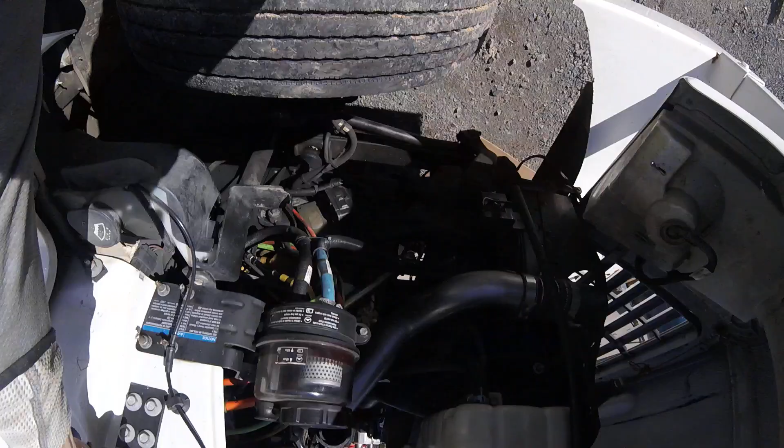Apparently this has been done on this truck fairly recently. Either that or this is just a freak of nature, because these all checked out good. So I'm not even going to adjust them, but I'm going to tell you how to do it in case.

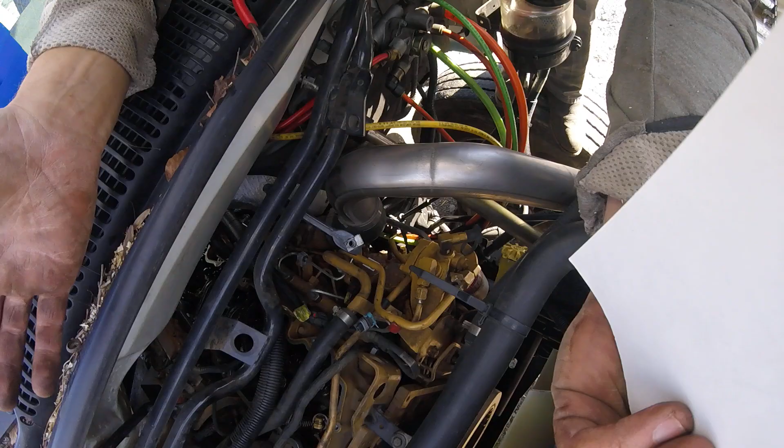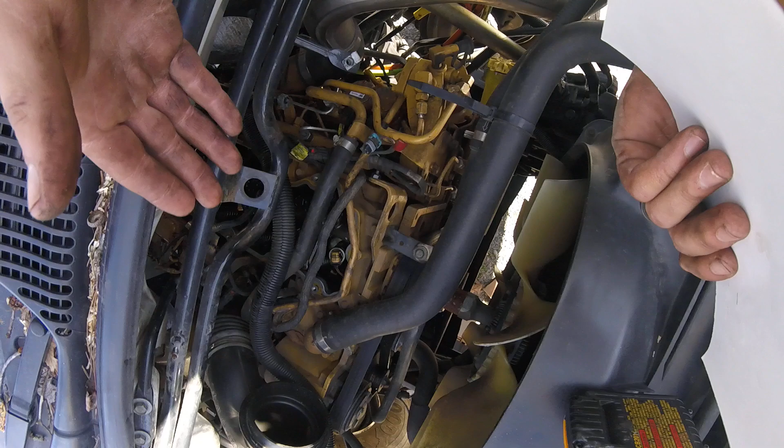This was super easy. Everybody said it was going to be really difficult. They made it out like it was just going to be this hard thing to do. It took me 15 minutes to get this cover off. Look down in there. Not hard.

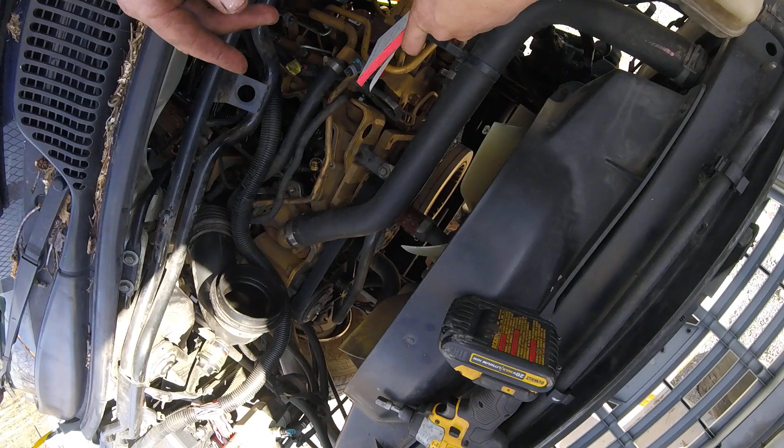What you got to do is, the first thing is to get it to top dead center on the compression stroke on cylinder number 1.

I used a pipe wrench to grab on the balancer there sideways. The pipe wrench kind of went in like this, sticking up, and pull it sideways, and then you can roll the motor over. It's not very difficult. You just gotta hold pressure on it. Don't jack it around. If you just hold pressure on it, it'll kind of bleed the compression off as it turns.

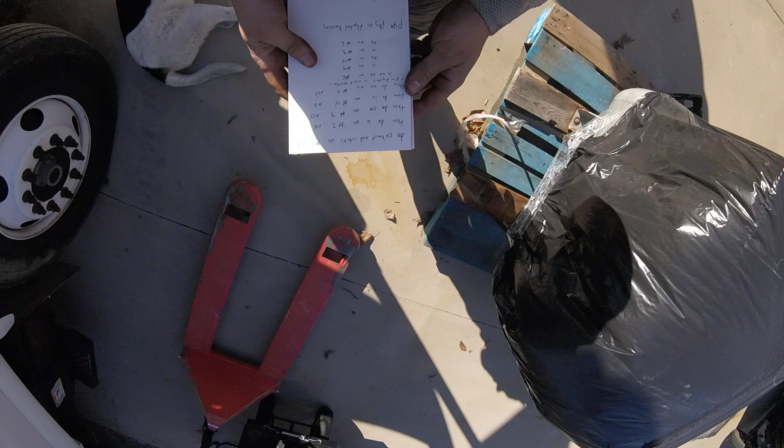You're gonna have to have 2 people, because you take a bolt. They actually said it's gonna be... 6mm bolt, I believe, I'm sorry. And you come over here to the passenger side, crawl up under here.

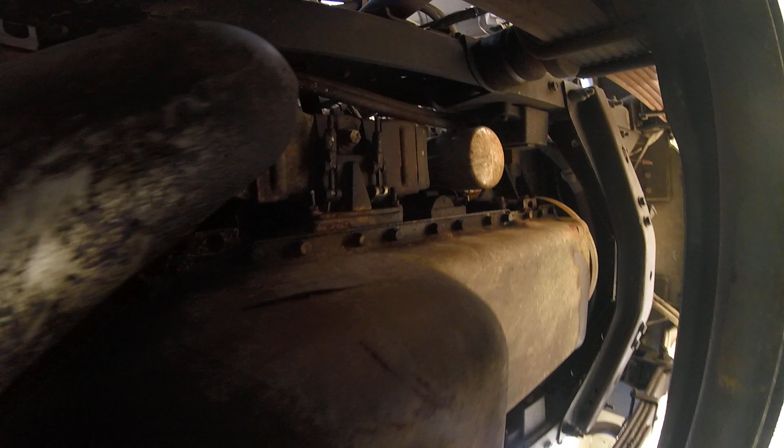Alright, this is the passenger side of the engine, and there's a hole. The bell housing is right here. I hope you can see it. There's a hole. Basically, at the tip of my pointer finger, there's a hole in that bell housing.

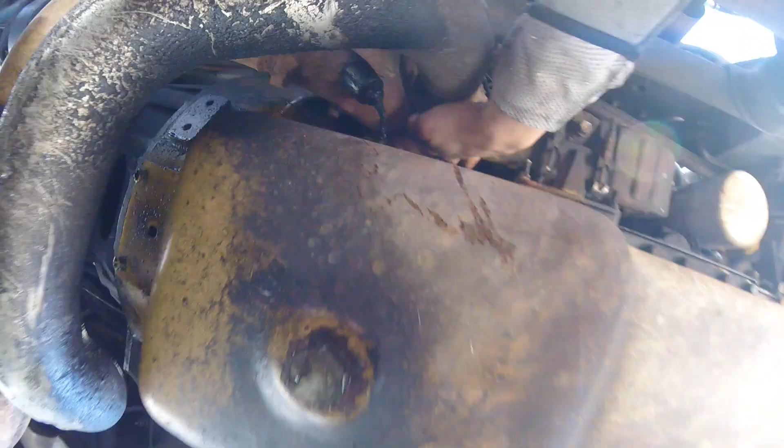You put the bolt in there. It needs to be, I don't know, 4 inches long, and just kind of hold pressure on it. And as somebody spins the flywheel over, hold pressure on it, and then there's a hole in the flywheel, so when the flywheel gets to that spot, it'll just slide in that hole.

And that's gonna either put you on number 1 top dead center on compression, or it's gonna put you on the number 6 cylinder top dead center on the compression stroke, which you have to do both.

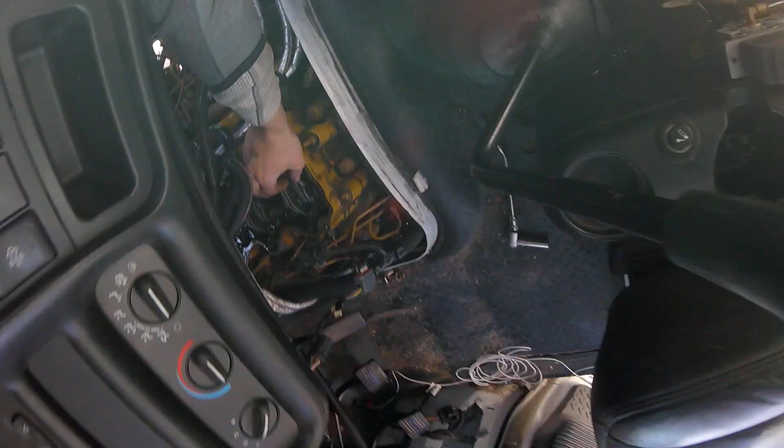So once it goes in there, go up to the valve train here, and if it's on number 6 on the top dead, then these 2 in the back will be loose. So I was on top dead on number 1 right here, so my exhaust is loose and the intake is tight. So if I went to the front, they would both be loose.

So again, if you're on number 6 compression stroke, these 2 will be loose, and you start adjusting from back here.

You'll go intake and exhaust. You'll do both of these. Set the lash on both of these first. You just loosen the jam nut here.

This is the Allen. So you loosen that up, slide your feeler gauge under it, tighten down the Allen until it's just got a little resistance on it, and then hold the Allen while you tighten this guy back down. It's 25 foot-pounds. You can torque them when you're done, it's a little easier.

So, what was I? Yeah, so just hold your Allen wrench so that when you turn this nut, it doesn't turn the Allen as well, and tighten it up or loosen it or whatever, so you know your lash is on. So you go intake, exhaust, and then

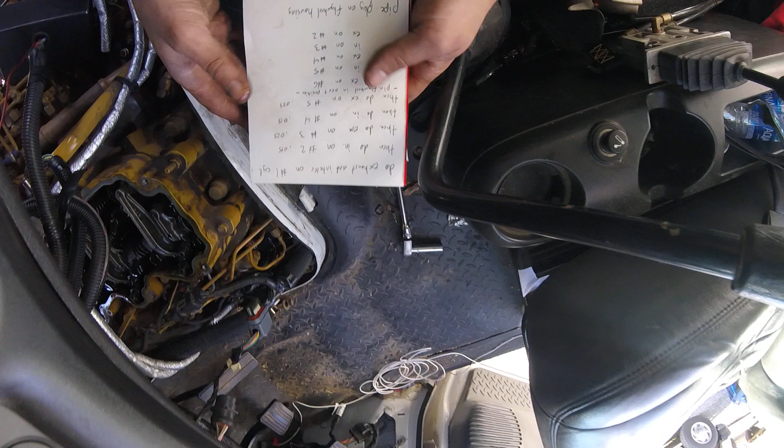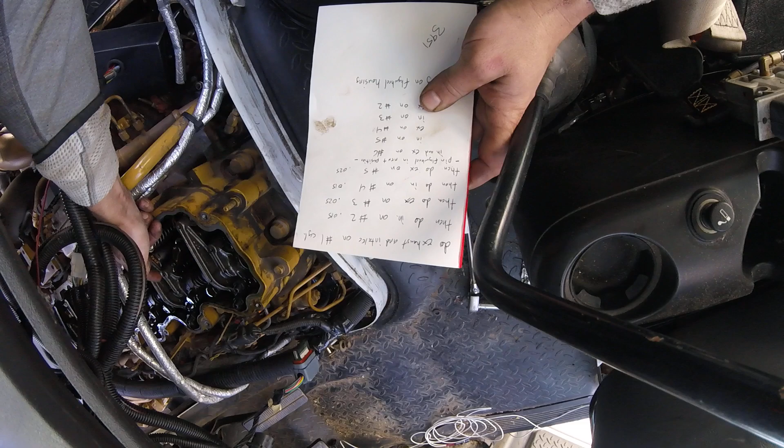you're going to go intake on the number 5. So you'll adjust intake on the number 5, don't mess with the exhaust. Of course, the intake is a shorter one. It's got your little bridge here for 2 valves. It's 2 valve on intake, 1 on exhaust.

So, this is kind of my notes here. It's backwards. So if you had the number 1 cylinder, if you were on the compression on number 1, you would start here and then just work your way all the way down. 15 thousandths on the intake, 25 on the exhaust.

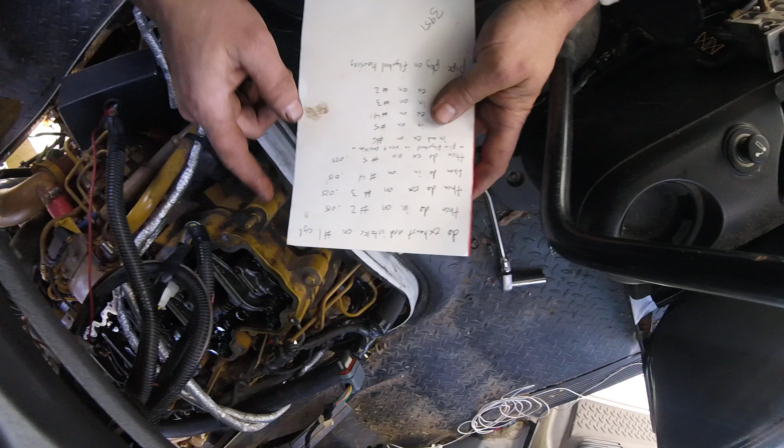So since we're on the number 6, then we're going to go to the intake on number 5, then the exhaust on number 4, intake on number 3, exhaust on number 2. So you alternate all the way up.

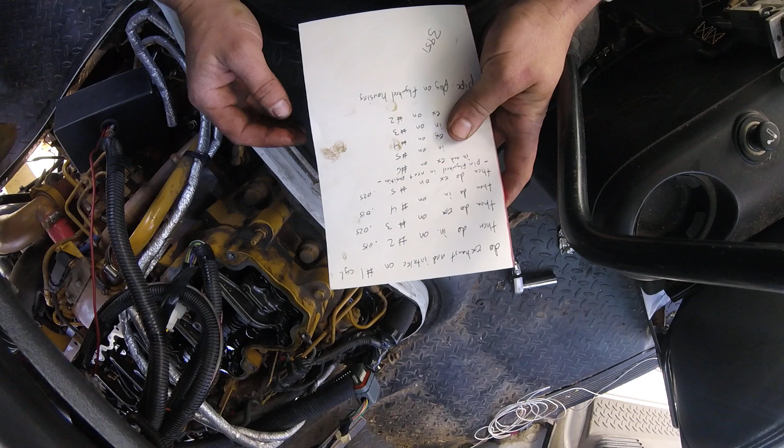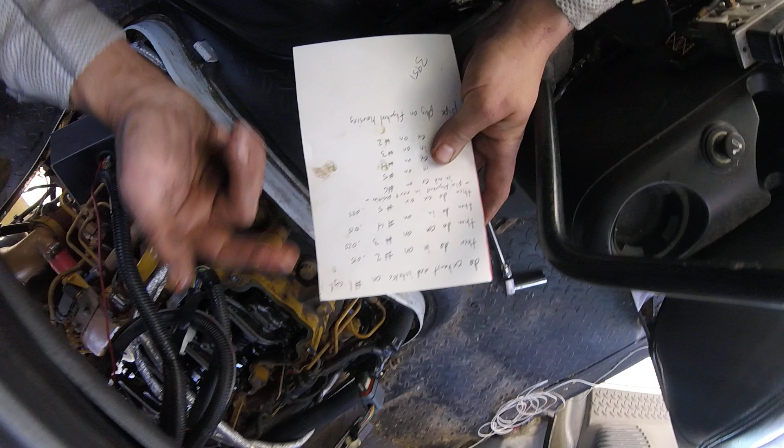When you get done with that, then you'll take your pin out of the flywheel, rotate the flywheel until the pin drops in the next hole. When you're on the next hole, you would be on cylinder number 1, compression stroke. So whichever one you do first, just make sure you do it in the right order.

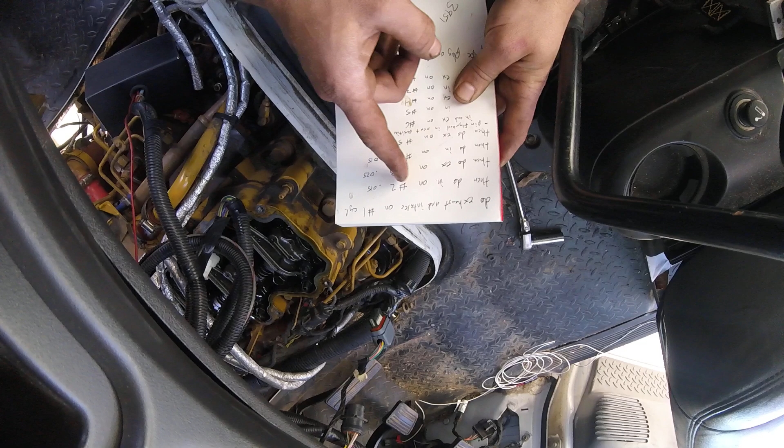Once you get the flywheel repinned, start on cylinder number 1, do the exhaust and intake, do both on the number 1 cylinder.

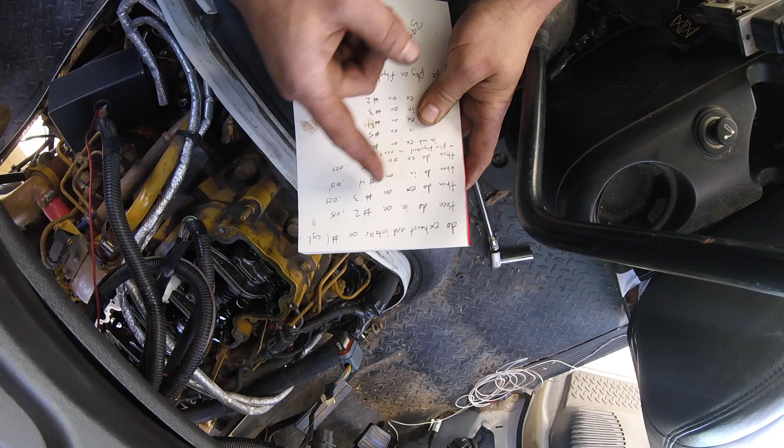Then go to the number 2 cylinder, do the intake. Then go to number 3 cylinder, do the exhaust. Number 4, intake. Number 5, exhaust. And then you're done. Go back, torque all your little retainer dealios here, and that's how you do it.

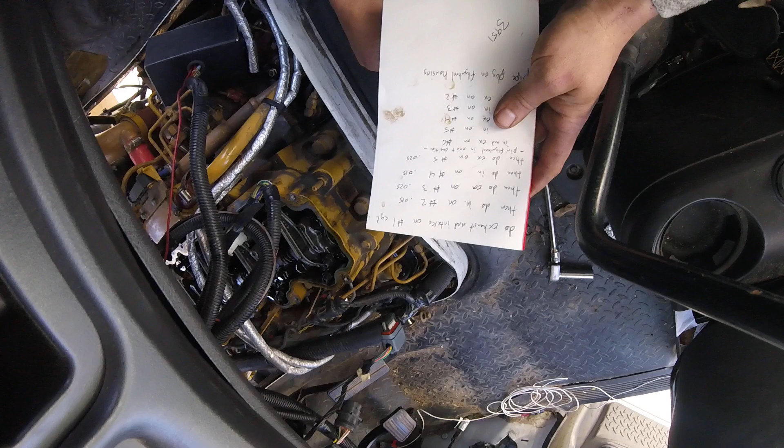That's the overhead. They make it seem like it's very difficult, and it's not. Maybe on different trucks it'll be a little harder to get to, but on these GMCs or Chevrolets, whatever, it's very, very simple to do.

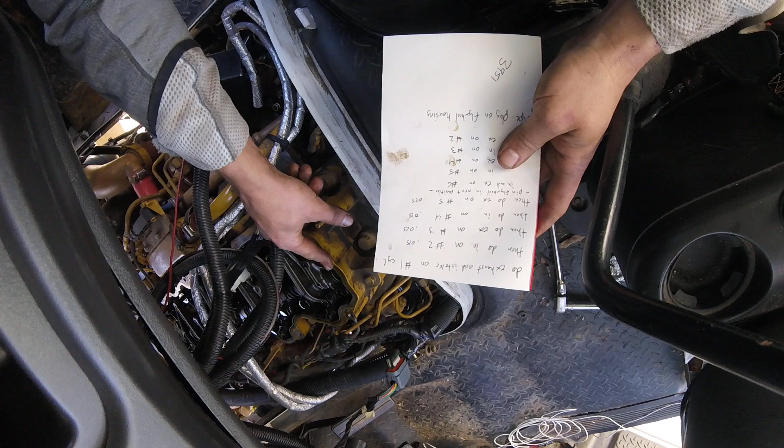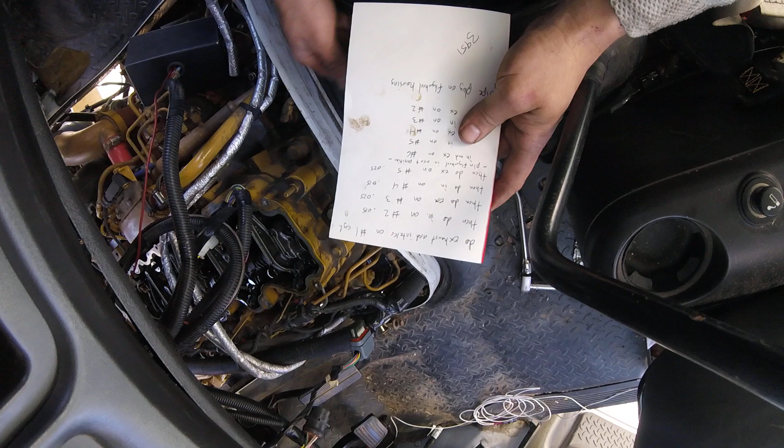So then just make sure your surface here is good and clean before you put the O-ring on it. It's an O-ring, it's not a gasket, so you can reuse it as long as it's not torn, or just do a visual inspection on it. Put everything back on, make sure all your wire routing's the same so nothing rubs, and you're done. Nothing to it.